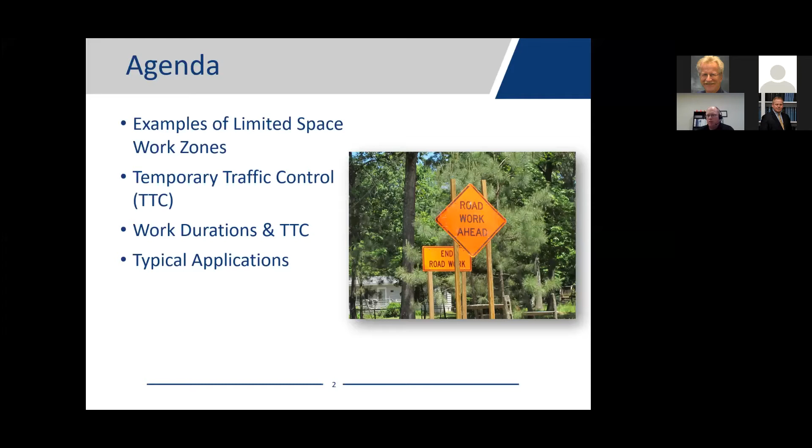All right, so, examples of limited space work zones, I have several listed here. Medians of divided highways, roadways with narrow cross sections, work in the center of a roadway, work areas with no escape routes, and limited space behind temporary barrier. These are all different types of limited space work zones, and maybe you're not thinking that you're in an area where there's limited space, but you could be. It's basically going to be any area where you have limited room to work. There's no buffers between you and the traffic. There's no escape routes, things of that nature.

Even when working in a median, behind barrier, there's things that you have to think about, not just the fact that you're protected by the barrier, but if that barrier is struck and that barrier deflects into your work zone, is it going to create a safety issue for the workers? Is equipment or materials blocking that barrier from deflecting properly, and how is that going to react in traffic? Those are all things that we have to think about when we're laying out and designing work zones, and especially dealing with limited space work zones.

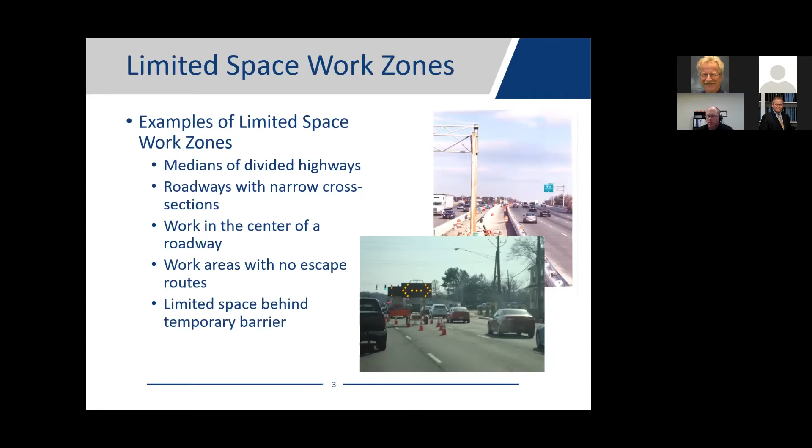So again, I want to touch on in detail general temporary traffic control. And I think having that understanding of basic temporary traffic control will help us understand how we can deal with limited space work zones. So temporary traffic control in general is any time that we interrupt the normal function of a roadway for work zones, for a special event, incidents, those types of things. Anytime we close a road or close a lane or even close a sidewalk.

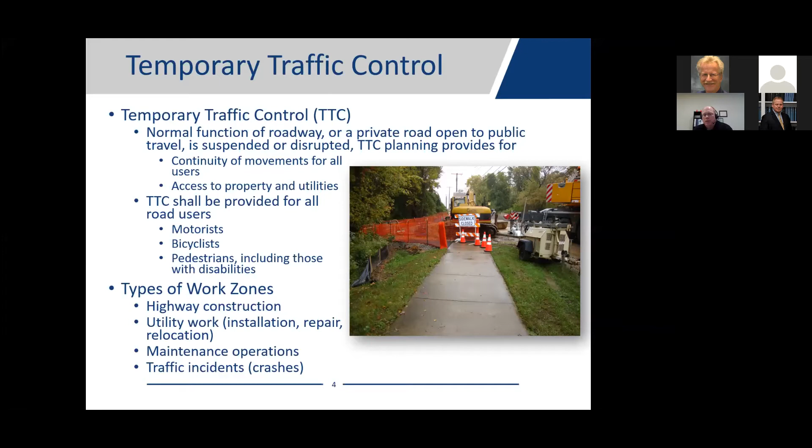The Manual on Uniform Traffic Control Devices requires us to provide for all road users. So it's motorists, bicyclists, and pedestrians, including those with disabilities. So all those road users need to be taken into account when designing and planning out your work zones and your traffic control. And again, types of work zones, we're looking at highway construction, could be utility work, installation, repair, or relocation of utilities, any types of maintenance operations, including mowing, those types of things, and traffic incidents as well. Those are all types of different work zones that we have to consider.

When you're looking at temporary traffic control, each temporary traffic control zone or TTC zone is different. There's things that go into the planning of your work zones. You need to consider the work duration. How long is the work going to take place? How long are the workers going to be present in that area?

Where is the work occurring? Is it on the shoulder? Is it well off the roadway where we don't need any type of traffic control, maybe just an advanced warning sign? Is it in the middle of a roadway, in the middle of a travel lane? Is it in the middle of an intersection? All those things need to be taken into account.

What type of roadway are we working on? Is it a local road? Is it in a subdivision? Is it on the interstate? That also plays a huge role in trying to plan out our work zones. Roadway geometrics is important mainly for sight distance. Is the roadway that we're working on on a horizontal curve, or is there a vertical curve that's blocking sight distance? That gets into looking at buffer space and things of that nature.

Where are the locations of intersections? If we have a lane closure on an arterial roadway, is that lane closure going to back traffic up to adjacent signalized intersections and cause gridlock? So that needs to be taken into account.

What's our road user mix? Do we have pedestrians? Do we have bicycles? Sometimes in Delaware, we've had a couple situations where we've had to deal with horse-drawn buggies in our Amish country, Western Kent County. So all those folks need to be taken into account when you're designing your traffic control.

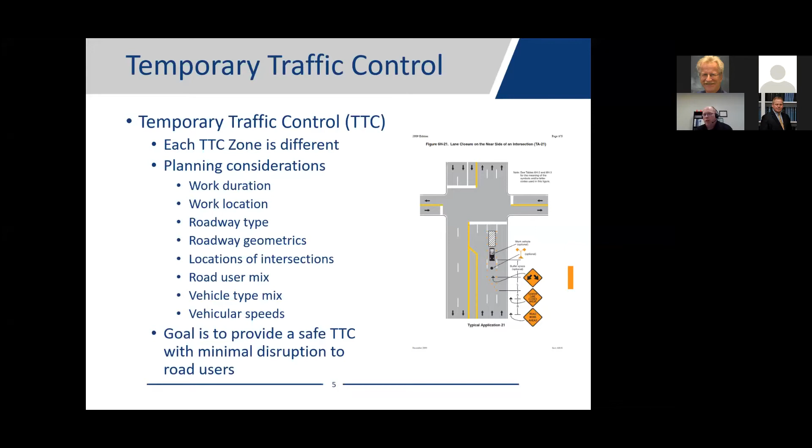So some rules and regulations that we generally follow. The federal rules: we have the Manual on Uniform Traffic Control Devices, the MUTCD. Pretty much everybody knows about that. There's final rules on work zone safety and mobility. Back in the 2007, 2008 timeframe, some new rules came out related to how we deal with traffic impacts in work zones, and also regulations on law enforcement in work zones, positive protection in work zones, those types of things. So that plays a role in what we want to do.

We have design guidance through AASHTO, mainly the Roadside Design Guide. Towards the end of the Roadside Design Guide, there's some guidance with respect to work zones and the use of crash-worthy devices. State rules, so state law, for example Delaware Code; other states have their requirements as well. State manuals on uniform traffic control devices, or some states may have a supplement to the federal MUTCD, and then you have DOT guidelines for design guidance as well. And if you're working in a local jurisdiction, like a municipality, they may have some rules of their own as well. So you want to keep those in mind.

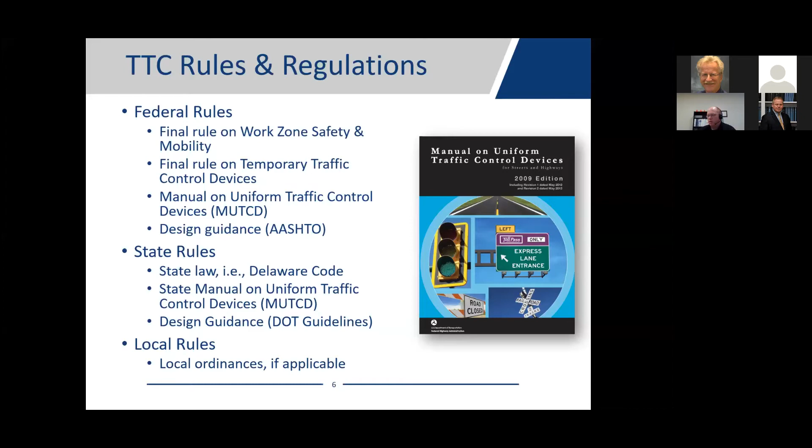From a design guidance standpoint, I mentioned the MUTCD. We have the Roadside Design Guide. You have the AASHTO Manual for Assessing Safety Hardware, which really talks about how we crash test our work zone devices. So most of our work zone devices are crash tested. They have to be crash worthy. So that's one topic that everybody needs to be aware of at least.

We have state and local design guidance, as I mentioned earlier, and there's a bunch of work zone training, guidance and research that's out there through ATSSA, the American Traffic Safety Services Association. They put out a lot of work zone training beyond just the temporary traffic control technician, traffic control supervisor, and flagger training. Through the FHWA grant courses, they have a lot of information, brochures and guideline documents that can be referred to when trying to design a work zone. ARTBA, TRB, NCHRP, they all have guidelines and research for work zone safety, LTAP training and guidance, as well as many others.

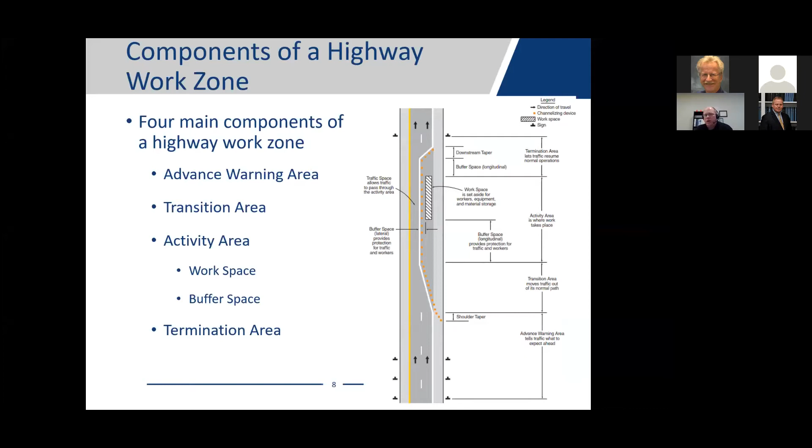As we get into trying to figure out how we're going to deal with a limited space work zone, it's good to understand the components of a work zone. Most work zones will have four main components: an advanced warning area, a transition area, activity area, and termination area.

The advanced warning area informs road users of what to expect. This can be done through a sign, a simple road work ahead sign, just giving the driver an advance warning that there's something going on up here, you need to pay attention. And we know how well those work.

It could be a vehicle on the shoulder with flashing beacons. Maybe it's a TMA, a shadow truck with flashing beacons and an arrow board in advance of a moving operation. Or for longer term work zones, it could be a series of advanced warning signs for a lane closure or a lane shift.

The distance of your advance warning is going to depend on the type of work, the duration of work, and the type of road. If it's a moving operation, your advance warning distance might not be that long. It simply might be a truck on the shoulder giving you that advance warning that there's something going on in front of that vehicle, or that there's a work crew on the shoulder of the roadway. It could be 2 miles, 3 miles in advance if it's on the interstate and it's high speed, high volume roadways. You could have much longer advance warning areas for those types of roadways.

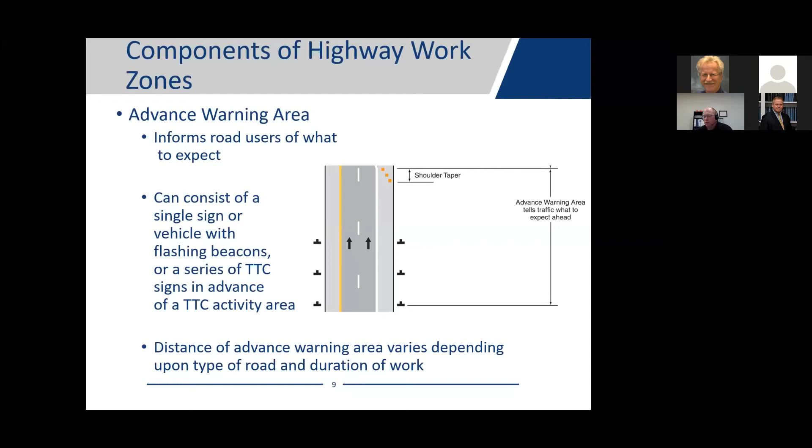Your transition area is where we're directing the road users out of their normal path through a taper, typically. It could be a merging taper for a lane closure, a lane shift taper, or even a shoulder closure taper.

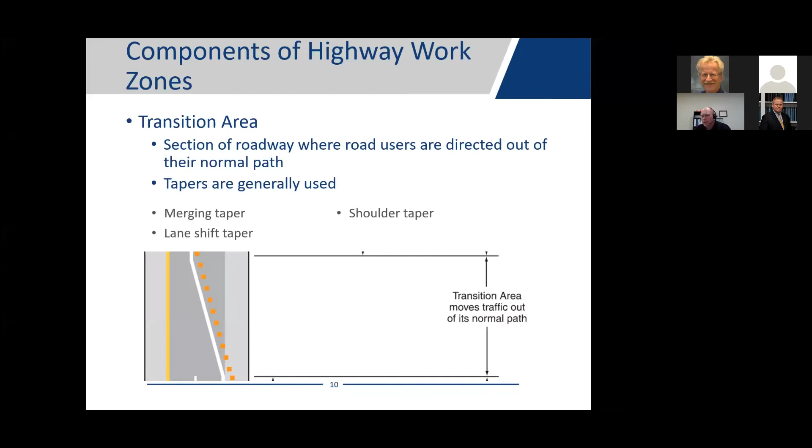But this is an important area. If we provide a gradual transition area, it's generally going to keep motorists in their lane and hopefully out of your workspace. But if we provide no taper or no transition area, or very abrupt transition areas, that could lead to erratic movements because drivers aren't expecting that, and could lead to having vehicles in your work area.

Taper lengths, most of you know this probably. We have two different types of calculations for figuring out taper lengths based on the speeds of the roadway and the width or the offset of the lane closure or lane taper and the speed of the roadway. So those are taken into account when we're trying to lay out our transition areas, and I just put that there for reference mainly.

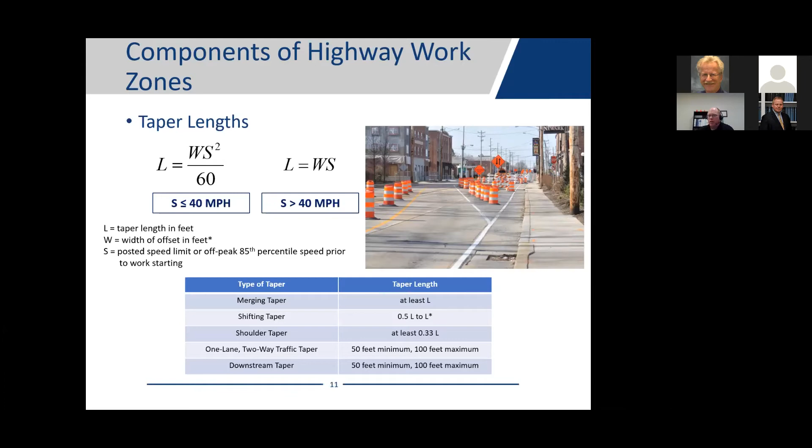Some examples of the different types of tapers. At the top, we have the merging taper. This is where we close a lane. This one we want as long as possible to allow for traffic to shift over gradually and merge with the open lane of travel as safely as possible.

We have shifting tapers, kind of in the downward middle section there, where we're shifting traffic out of their normal path, but there's no lane closure. And then you have your shoulder taper, and coming out of your work zone, you also have a downstream taper, which is optional. But that's alerting the motorists that the road work area is done, and we can resume normal operations.

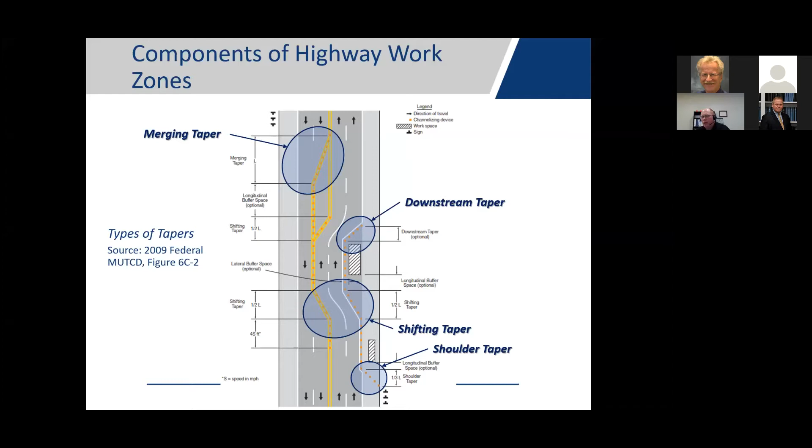The activity area, probably one of the most important areas. This is where the work is taking place, and this is where we get into the limited space. The MUTCD recommends buffer spaces, both longitudinal and lateral, so next to you and behind you, from a buffer standpoint, and that's to provide protection of the workers away from traffic. The goal is to keep traffic away from the work area as much as possible. So having this buffer space allows that to happen.

Lateral buffer space just literally gives that extra sense of better feeling away from higher speed traffic. Generally on higher speed roadways, we try to get at least an additional lane of buffer between the workers and the traffic if possible. It's not always possible, unfortunately, but that's what we strive to do in those situations.

The longitudinal buffer space is good for if you're working on a curvy roadway and you have limited sight distance. You can give longitudinal buffer to your flaggers, between your flaggers and your work area for like a 2-lane roadway, to give the traffic the ability to see the flagger and react appropriately, rather than having your flagger in a bad spot on a blind curve or something like that, leading to abrupt stops.

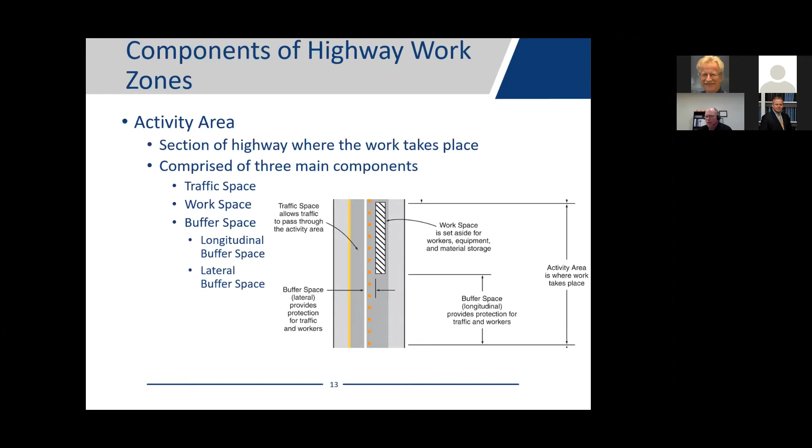Also, buffer space can give you area to have shadow vehicles with TMAs to protect your workers. But the one thing the buffer space is not for, it's not for storing equipment or materials. The buffer space is simply that - buffer space for in case an errant vehicle were to come into your work zone, you have enough space to allow that vehicle to not get into your workers and not strike your workers.

Termination area - this is where we direct the road users back to their normal path and normal operations. Typically it's denoted with an end roadwork sign, could be a speed limit sign or some other type of warning or informational sign. The taper is generally short, 50 to 100 feet. And the buffer space, again, you may have that downstream of your work zone as well. That can be for protection of your workers, or just to keep the traffic out of the work area as much as possible.

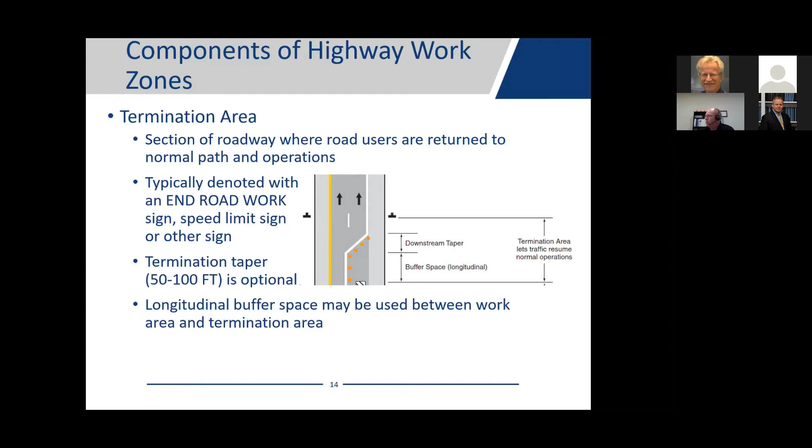So, any questions so far? Is there any questions in the chat pod? Nothing yet, Adam. Okay, great.

So the next thing we want to look at, besides just understanding the general components of a highway work zone, are the durations of work. This is a major factor in how we figure out what types of devices we're going to use, the number of devices, and what types of information we're going to give to the traveling public. There's 5 categories of work duration, spelled out in the MUTCD section, chapter 6G. It's long-term stationary - this is generally our fixed work zones, work that occupies a location more than 3 days. Generally we'll use traffic barrier, drums, and permanent warning signs, those types of things.

We have intermediate term stationary. Now, this one's a little confusing. It's work that occupies a location more than 1 daylight period up to 3 days - so basically 1 to 3 days. Or it's nighttime work lasting more than 1 hour. So you could have a lane closure for the nighttime hours just for one night, and that's considered intermediate term stationary. This is important because for nighttime operations, you need devices with higher reflectivity so drivers can see them as they approach your work zone.

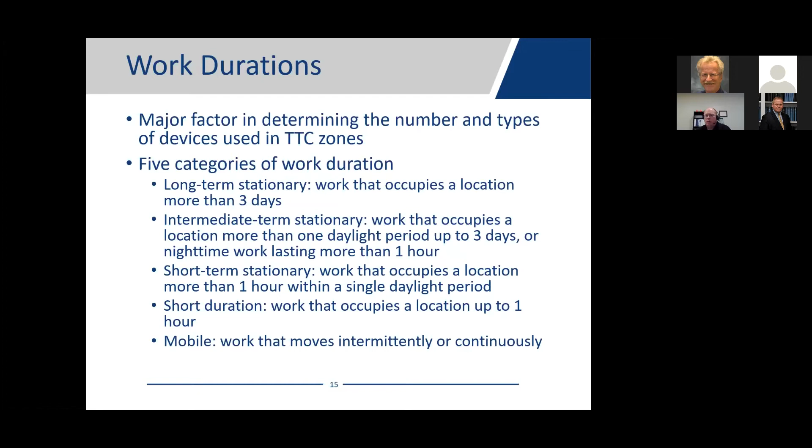Short-term stationary is work that occupies a location for more than 1 hour within a single daylight period, at a fixed location. That differs from short duration, where the work occupies a location up to 1 hour, then it might move to another location after that 1 hour period. Mobile work is work that moves intermittently or continuously - that's pretty straightforward, could be sweeping operations, pavement marking operations, those types of things.

For long-term stationary work zones, the luxury we have here in most cases - not all the time, but most cases - we have ample time to plan these out. You'll generally get the full complement of devices. You're looking at probably temporary traffic barrier, larger channelizing devices, signs, maybe guide sign changes, additional warning signs beyond the standard road work ahead, those types of things. We're going to be altering pavement markings because we're probably going to be shifting traffic out of their normal travel lanes.

Temporary roadways and temporary pavement are included, but these still have limited space work zones. So again, the example I gave earlier, when you're working in the median of an interstate and that median's only 10 feet wide, that's a limited space work zone, especially if you have barrier on both sides.

We had a project in Delaware a few years ago where we were replacing the concrete median barrier that was dividing North and South 95. For that project, because of the limited space, we knew we needed to maintain positive protection during the project when the existing median barrier was removed. So we were going to end up with temporary barrier on either side of the roadway.

But to give the contractor more space, we opted with utilizing a movable barrier system that when the contractor was working during the nighttime hours, they could move the barrier out to take an additional buffer lane. They ended up taking actually 2 lanes in that case to give them more space to work, space for concrete trucks to come in and pour the concrete for the barrier. Those considerations were made for that work zone.

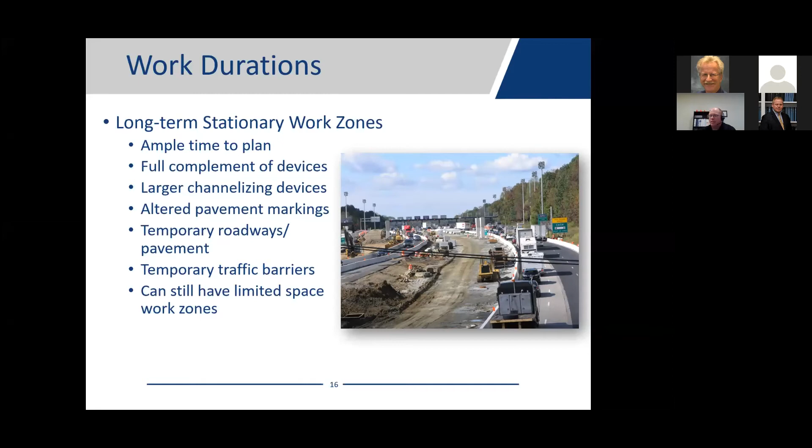Intermediate-term stationary work zones include nighttime operations, and the MUTCD requires that retroreflective or illuminated devices shall be used. Work zone lighting is going to be used in these situations.

Generally, you're going to have channelizing devices, drums for the most part, signs, and shadow vehicles with TMAs. You may not have altered pavement markings in an intermediate stationary work zone, since generally you're not out there long enough for temporary or altered pavement markings to have a benefit. In limited situations, you might use barrier, but the time it takes to deploy those devices, barrier, additional channelizing devices, and signs could lengthen the project and expose workers to more traffic than necessary.

So that's something to keep in mind when planning your work zones. If you can minimize the exposure time of the workers, that minimizes how much time they're going to be out facing issues with traffic.

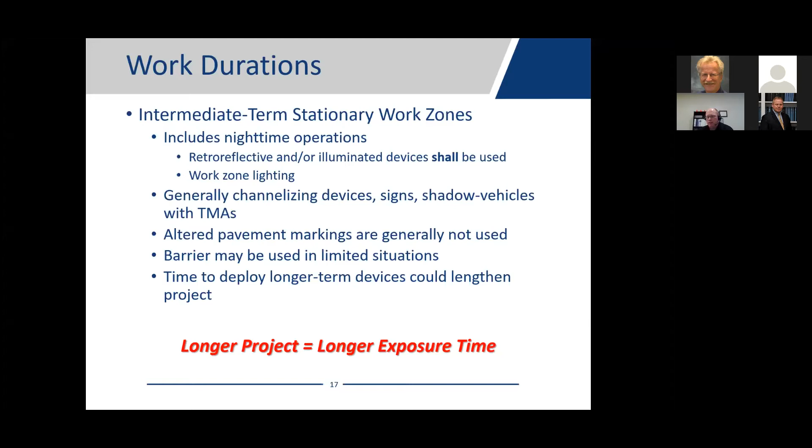Short-term stationary work zones are typically your maintenance and utility operations. These generally last a day, with generally fewer devices or more portable devices. You'll typically use cones rather than drums, likely use flaggers for a lane closure on a two-lane roadway, signs with portable sign stands, and shadow vehicles with truck-mounted attenuators.

Typically, these devices are deployed and picked up the same day, hence the need for them to be more portable. Again, you want enough devices to provide enough information to the traveling public, but not so much that you're taking more time deploying the devices than physically completing the work. You can also have limited space work zones in this situation.

For short duration and mobile work zones, they kind of go hand in hand. These activities will require different traffic control strategies. Generally, your devices are going to be very mobile—you could have signs mounted on trucks.

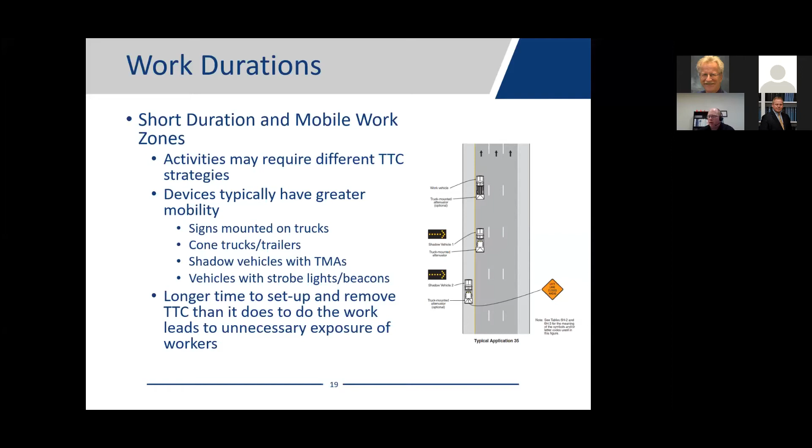So any questions so far? A couple more slides here, and then we can open it up to detailed questions if anybody has any.

So a couple of solutions we can consider. Here we have a work location in the center of a two-lane roadway—one lane in each direction—with a median separating the directions of travel. In this case, they are improving the median curbing and drainage. So what we end up with is traffic on either side of the work crews with no escape route.

There's a couple of solutions we can consider. If it's a long-term work zone, positive protection is probably one we really want to think about hard. Where that barrier is placed in relationship to the actual work area, to make sure it's safe and constructible, is important.

If we need to shift traffic away from the work area, and if we have a shoulder capable of handling traffic, that's the first thing we need to do—shift that traffic away, give the workers enough space to do the work, and place the barrier so there's some buffer between the workers and the deflection of the barrier if it's struck.

If we have an additional lane, if we're able to, we can close that to provide a lateral buffer. In a couple situations I've been involved with, we've done the median in sections and utilized flaggers to alternate traffic on one side of the roadway. So there you're only dealing with one direction of travel at a time. You're flagging your traffic through your work zone, and taking into account that you have an escape route for your workers if somebody were to come into your work zone for some reason.

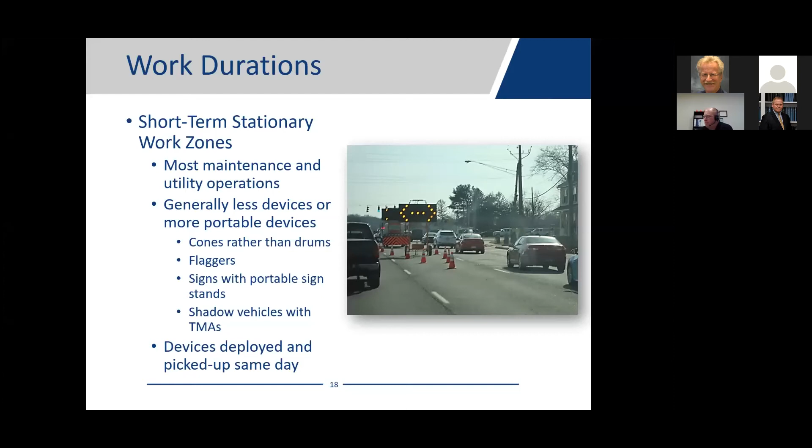Okay, all right. So we talked about that solution there. So we're going to go on to this one here, another location, a roadway with a narrow cross section. Here's an example picture. We have narrow lanes, there's no shoulders.

Where do you put your equipment, your workers? Do you have enough room if you were to set up channelizing devices and close one of these lanes and use flagger control? Do you have enough room to physically allow traffic to safely pass your work zone without encroaching and knocking down all your channelizing devices all the time?

In a long-term situation, we might consider doing some temporary widening to provide some additional space to do the traffic control. But that's not possible in a short-term or short duration situation, so we would consider closing the road and detouring traffic, even if it's just a daytime closure.

We've done a couple projects with high friction surface treatment where, on a 20-foot wide roadway, we're doing one lane at a time of high friction with the automated machines. They take up a lot of space, so we pulled the trigger and just said we're going to close the road to detour traffic for the day it takes to get the high friction surface treatment in place, and then open the road back up when that's cured. That's worked very well.

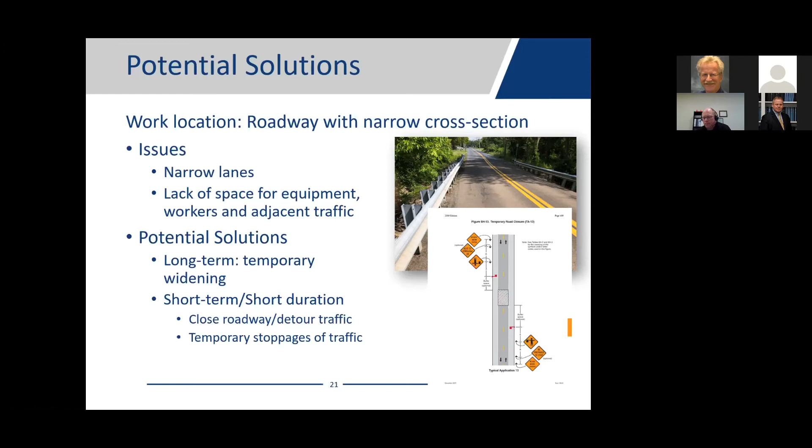Some final considerations. Generally, we'd like to avoid situations where there's no escape route for your workers. There's always a chance that an errant vehicle will encroach on your work area, and you want to allow your workers to run from that and get out into an area where they can escape. If we have traffic on both sides, there's no escape route, because if they run left or right, they're running into traffic.

So that's something we really want to strive to avoid as much as possible. There are times it's not possible to avoid, but there are enough solutions out there—temporary stoppages, buffer lanes where possible, even short-term road closures—to avoid situations with no escape route.

If we're in long-term work zones, consider positive protection. Think about the type of barrier you're using and what deflection it will have when struck. Typically, concrete barrier will have a 4 to 5 foot lateral deflection. So if you don't have that space behind your barrier, you need to consider pinning it. There are plenty of pinned barrier options available now that are MASH compliant. They're more expensive, but that extra expense can save somebody's life.

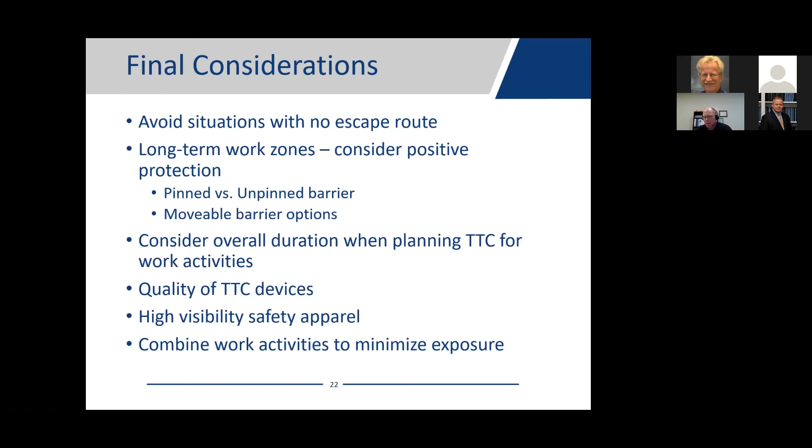We have one question, Adam. What are or where can I find requirements for lighting for mobile operations? For example, trash, brush, or leaf collection crews starting in the early morning hours. There's guidance. AASHTO has guidance related to work zone lighting considerations. If you go to their website and search under their work zone grant information, I believe there's some guidance documents there that will provide some information about lighting considerations.

The MUTCD has lighting requirements for flagger stations. Might be useful for the brush clearing or the early morning situations as well. There's a bunch of portable lights on the market, not just the pull-behind light tower, but even ones that hook into your truck's hitch receiver. That are balloon lighting, and they provide an ample amount of light.

I know DelDOT has been testing them on incident scenes. Like I said, some go into your hitch receiver, some are on tripods, stands. They're highly portable, and they put out a lot of light similar to what a typical light tower would put out.